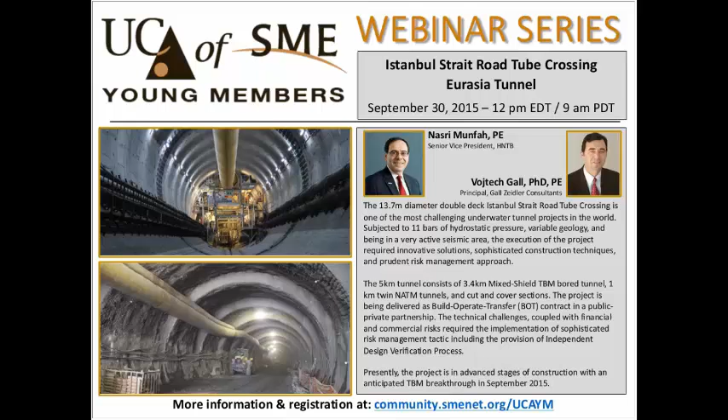Dr. Gall has over 25 years of experience in the design, construction, and construction management of tunnels and underground structures. His expertise spans from soft ground and rock TBM tunneling to cut and cover techniques. He frequently serves on expert review panels dedicated to the investigation and improvement of tunneling schemes from initial inception stages through final design development. His peer review services encompass a wide variety of facilities ranging from hydropower schemes in remote settings to complex transit structures in urban settings. He has authored over 40 technical publications on the subject of tunneling and lectured extensively on the implementation of modern tunneling techniques. With that, I'm going to turn control over to our speakers, Nasri and Vojtech.

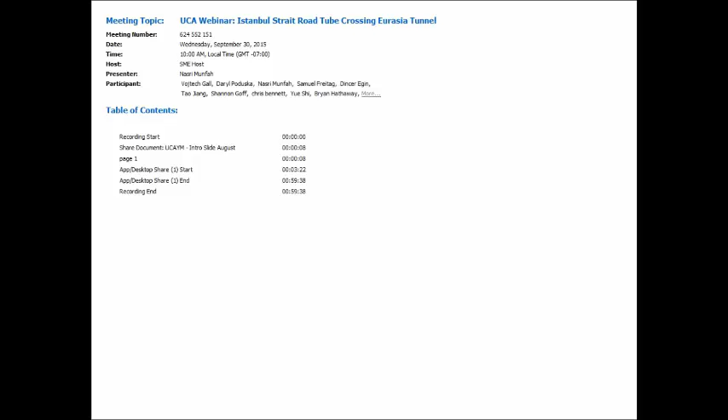Thank you, Shannon. This is Nasri Munfah, and Vojtech is with me here in my office, and we'll be making the presentation together. Just a minor editorial: Shannon mentioned that the TBM was supposed to break through in September. Just to let you know that it beat its schedule, and the breakthrough took place in August, on August 22nd.

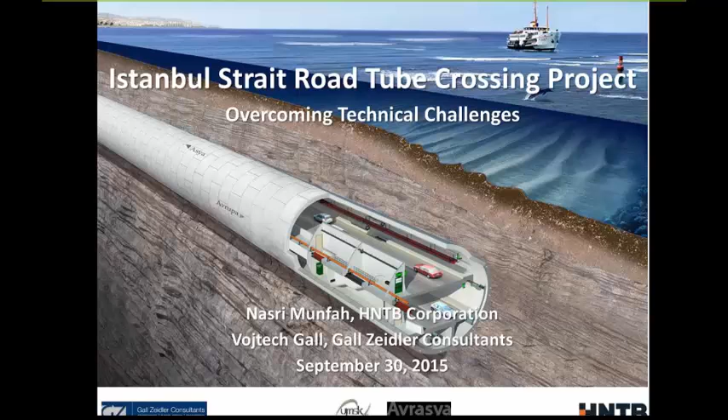The Istanbul Strait project is one of the iconic projects around the world right now. In today's topic, we're going to be covering an overview, technical challenges, the TBM Bored Tunnel, the NATM Tunnel, and to show you the construction progress up to now.

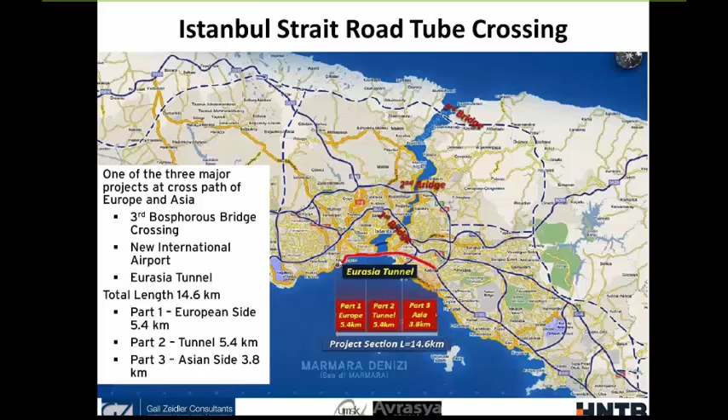The project consists of 3 major areas, 3 major components of the project. It is a road tunnel connecting the Asian side of Istanbul with the western side of Istanbul, which is the European side. It is one of 3 major programs that are going on in Istanbul at the present time. One is the third Bosphorus bridge that is taking place at this location, a new international airport somewhere in this vicinity, and our project, which is the Eurasia Tunnel. The Eurasia Tunnel will consist of 3 parts: European side, the Asian side, and the tunnel itself, as we'll be talking about in a minute.

This particular project is the first public-private partnership project in Turkey. It is being delivered on a BOT basis, which is build, operate, transfer. The concessionaire for the project is a joint venture of Yapı Merkezi, one of the largest Turkish contractors, and SK Engineering and Construction, a Korean contractor. Jointly they form a joint venture called ATAS. ATAS, as the developer, is contracted to a construction joint venture, Yapi Merkezi SK JV. The project total investment will be about $1.3 billion, in which $960 million were from various financial institution loans, and the developer put in $320 million.

To recover the cost, the project will be operating for 26 years, and there is a guaranteed traffic volume of 80,000 vehicles per day. However, based on traffic studies, it was determined that the traffic could be as much as 100,000 vehicles a day.

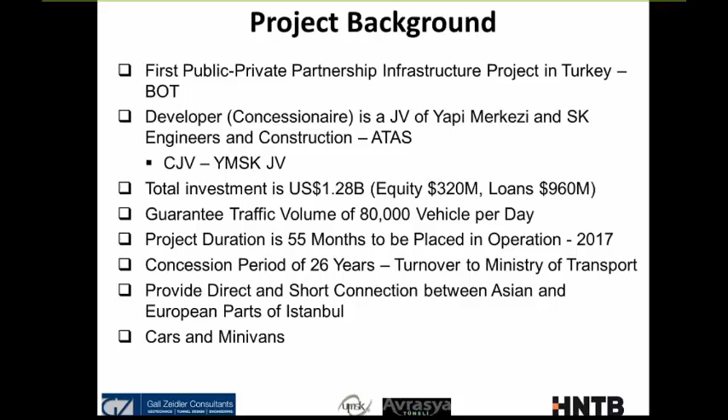It will provide a direct and short connection between the Asian and the European parts of Istanbul, and it is made specifically for cars and minivans only.

With this project, at the present time, traffic going between the Asian side and the European side goes around one of the two existing bridges, which is the shortest distance, and takes about 100 minutes of travel time. With the completion of the tunnel project, the travel time will be about 15 minutes to get to the same point, providing a shortcut between the Asian side and the European side.

It will provide considerable relief of traffic congestion on the Bosphorus bridges, significant time saving, and associated environmental improvement in terms of emission and pollution.

In addition, there are two major airports in Istanbul: the Atatürk International Airport, and Sabiha Airport, which is the local airport within Turkey. This will again provide a short connection.

One of the unique things about it is that because the project is in the historical part of Istanbul, having a tunnel rather than a bridge will improve the visual appearance and will not impact the silhouette of Istanbul.

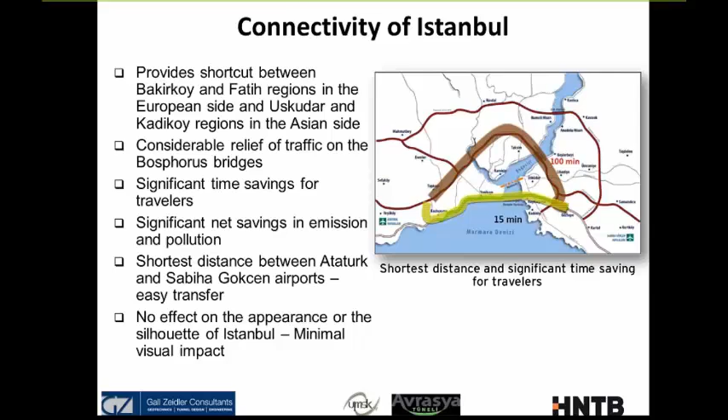The project is being delivered by a global team. Beside the developer and the contractor, the design leader is Parsons Brinckerhoff, and HNTB with Gall Zeidler is the design verification engineer.

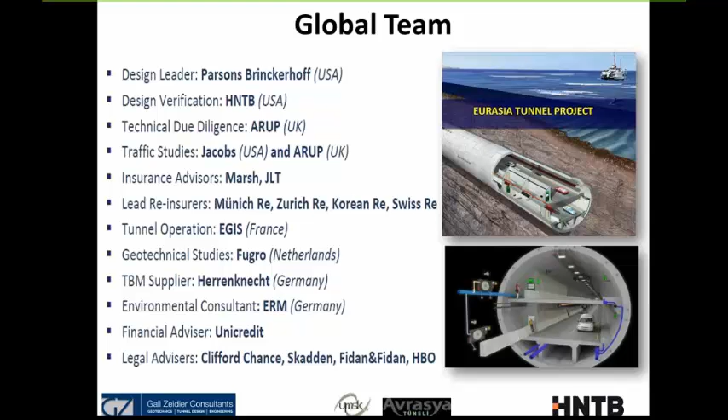Due diligence was done by Arup from the UK, and geotechnical studies were done by Fugro. Tunnel operation will be done by Egis from France, and the TBM supplier is Herrenknecht from Germany. As you can see, it is a global team bringing the best available resources and technologies to the project.

I'm going to go over the project overview right now. This area on the west side is the historical part of Istanbul, on the European side. There is the Bosphorus crossing here, connecting the Black Sea to the north with the Marmara Sea to the south. On this side is the Asian side, which is mostly residential.

So in a sense, there is a lot of traffic going between the Asian side and the European side. The project consists of three parts, as I said earlier. The first part is on the European side along Kennedy Boulevard, which consists of about 5.4 kilometers of road widening, bridges, underpasses, and pedestrian crossings.

Then the tunnel itself, which is part two, as well as the Asian side. The Asian side consists of 3.8 kilometers of road widening also, and modification to the connections to local streets and to the existing freeway system.

The tunnel itself, which is part two, consists of 5.4 kilometers of 2x2 traffic lanes on top of each other, as you can see in the cross section.

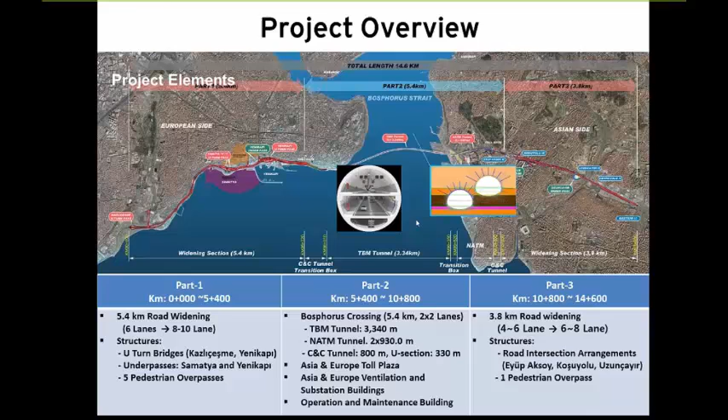The bored tunnel itself is designed to accommodate the two traffic envelopes, eastbound toward Asia and westbound toward Europe. The tunnel cross-section was determined to require 12 meters of inside diameter.

Plus a precast segmental liner of 600 millimeter thickness, resulting in 13.2 meters outside diameter.

The upper roadway deck was designed to be cast in place, while the lower roadway deck was designed to be precast. In addition to the upper roadway and the lower roadway, there is the utility gallery providing all the electrical and mechanical systems.

The upper deck and the lower deck are interconnected at various intervals to provide for emergency evacuation, as well as at certain intervals there is an emergency stop for breakdown if a car broke down.

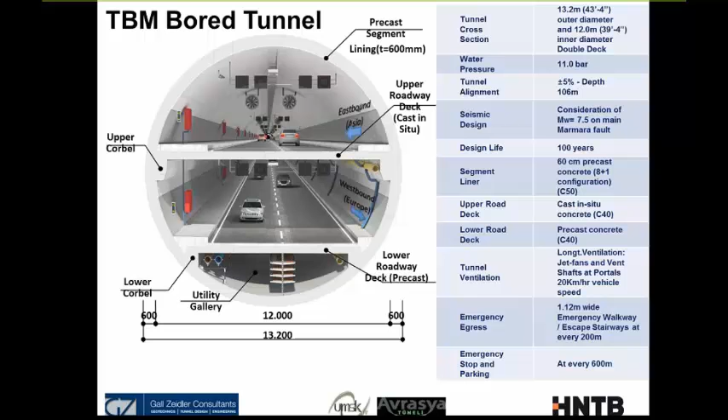The ventilation is provided by jet fans plus exhaust fans at the two ventilation buildings, one on each end, in addition to all the traffic signals and signs and the fire life safety requirements within the tunnel itself.

As I mentioned, the upper and lower roadways are interconnected with an emergency passageway. Just in case of fire in one of the two roadways, people can evacuate to the other roadway, and that becomes the emergency escape route.

As for breakdowns, every 600 meters an alcove was provided for car breakdown or tire replacement or things of that nature, in order to maintain the traffic flow.

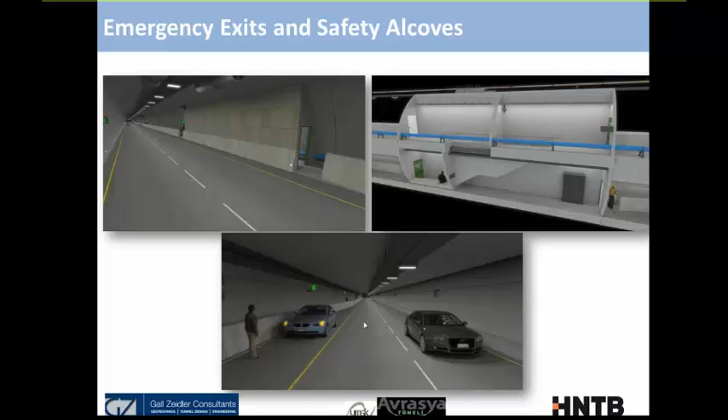The project faced many challenges and many risk issues, and we're going to be discussing some of them today, though not all of them due to the limited time we have.

Some of the challenges include the large diameter of a double deck tunnel in that location, and the complex and variable geology and hydrology in the area.

In these conditions, we are encountering mixed face conditions that need to be addressed during both design and construction. In addition, the tunnel is very deep in order to cross the channel, which is 62 meters deep, resulting in the tunnel being about 106 meters deep.

This results in 11 bar of water pressure. Furthermore, there is a high seismic zone, so the tunnel has to be designed to accommodate high seismic conditions, as well as complex transition structures on both sides, since we are going from two-over-two configuration to two tunnels side by side. Those transition zones are deep cut and cover structures adjacent to the water body.

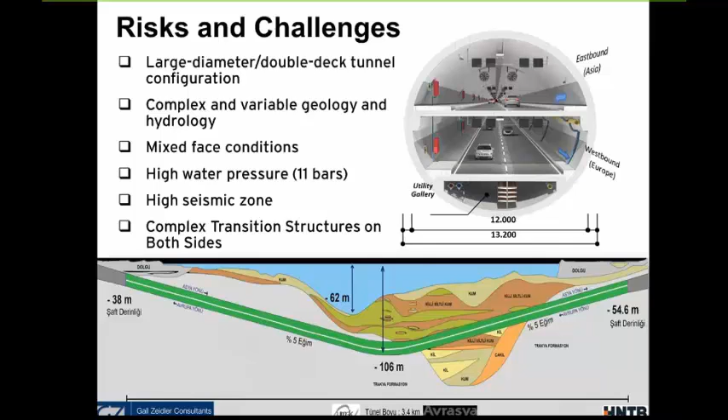As part of risk mitigation, the owner and the developer identified a need for independent design verification. That's where Gall, Zeidler, and HNTB teamed together to provide this service to the client.

The independent design verification role is critical in addressing all critical issues, reviewing the design for correctness, identifying potential risk issues, identifying potential corrective action, and providing betterments and potential solutions to the project's challenges. This system was implemented throughout the entire phase of the project, from conceptual planning, through final design, construction, and facility operation.

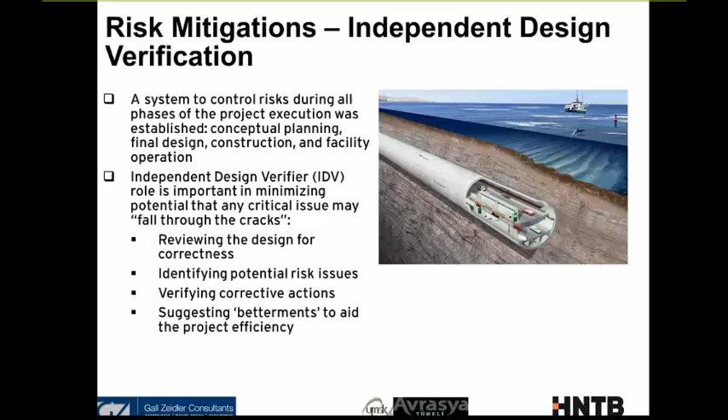And it was not just limited to the structural component, but also expanded to all issues, including mechanical, electrical, fire life safety, and all related elements required for the functioning of the facility.

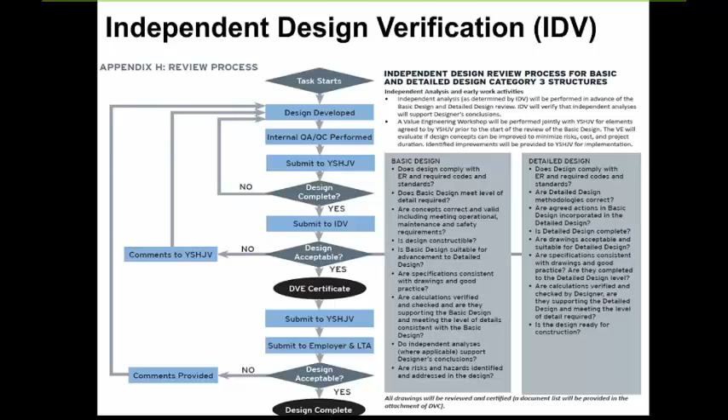A detailed design verification process was established and was reviewed and approved by ATASH, the developer, as well as the owner, in which every element has to go through a detailed independent review and verification. All calculations must have independent checks, and all analysis must be independently reviewed and verified.

I'd like to talk a little bit about the geology of the area. The Bosphorus Strait was formed by major historic tectonic forces that resulted in two rock formations on both sides of the Bosphorus, called the Trakya Formation, which is highly fractured, faulted, and intruded. The Trakya Formation consists mainly of sandstone and mudstone, and is highly fractured and water-bearing strata.

In addition, it has several locations with a lot of volcanic dike intrusions.

Going from the Trakya Formation into alluvial deposits within the body of water, the alluvial deposit consists of coarse-grained soils including gravel and sand, as well as fine-grained soils like silts and clay, which vary vertically and longitudinally.

Extensive geotechnical investigation was performed on land as well as in the water. Fugro did a lot of this investigation, as you can see from the marine borings taken along the alignment of the project.

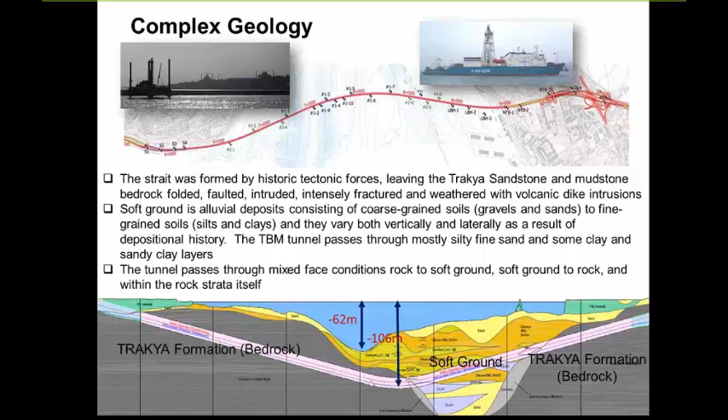In addition, there are faults at various locations along the alignment, and the rock property varies within the cross-section itself as well as along the alignment.

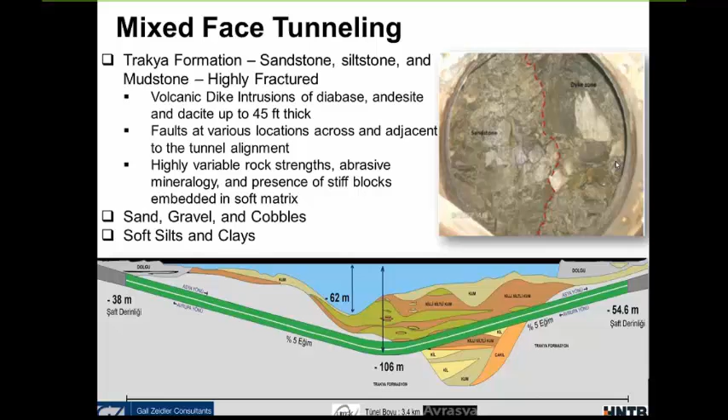The other challenge is the seismic condition of the area. The location happened to be at a cross between three continents, so there are three tectonic plates, the African, the Anatolian, and the Eurasian plates. They all happen to be at that location.

We anticipate that at least one medium intensity earthquake will happen in Istanbul every 50 years. Therefore, the tunnel has to perform under earthquake conditions, in a couple of situations. One is to continue to be operational, and the other one is to be repairable very quickly.

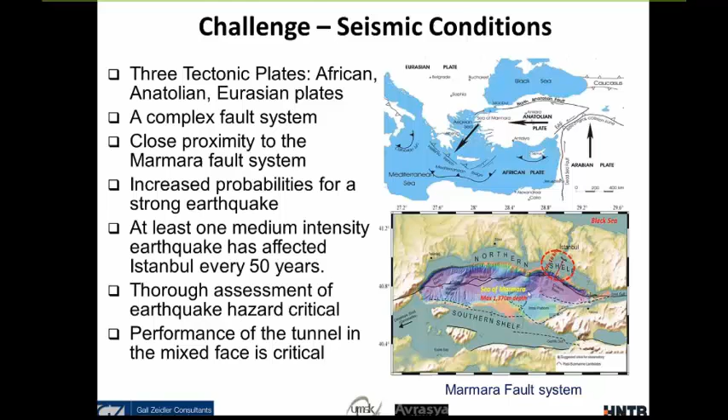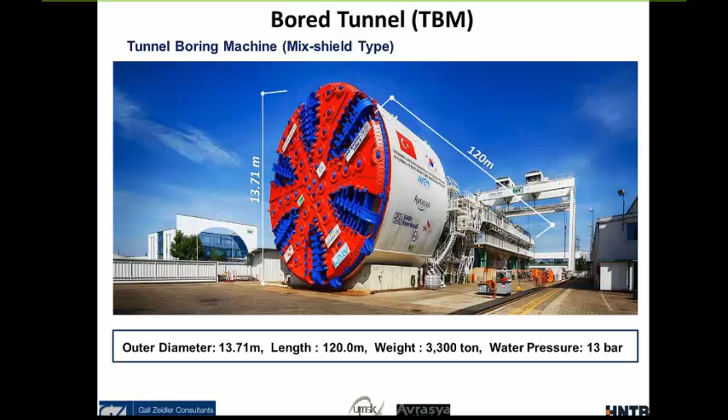In order to build this tunnel, the design called for a TBM. The selection was made using a Herrenknecht Mixed-Shield TBM, which is a slurry TBM in a sense. The TBM was manufactured in Germany and was delivered to the project site. The outer diameter of the TBM is 13.71 meters with a length of 120 meters, and it's capable of handling 13 bar water pressure.

The TBM design was designed to handle mixed face conditions and to operate mostly always in a closed mode situation. As you can see here in the face of the TBM, it had disc cutters as well as soil knives or soil scrapers, distributed throughout the face, and made accessible from the back. I will talk about that a little later. In addition, behind here there is a jaw crusher to deal with boulders as well as cobbles that may be encountered.

The plan was to advance between 6 to 7 meters per day, average daily advancement, and the maximum they were able to achieve was 18 meters per day. That was within the planned schedule and was achieved. It was launched on April 19, 2014 and completed its drive on August 22, 2015.

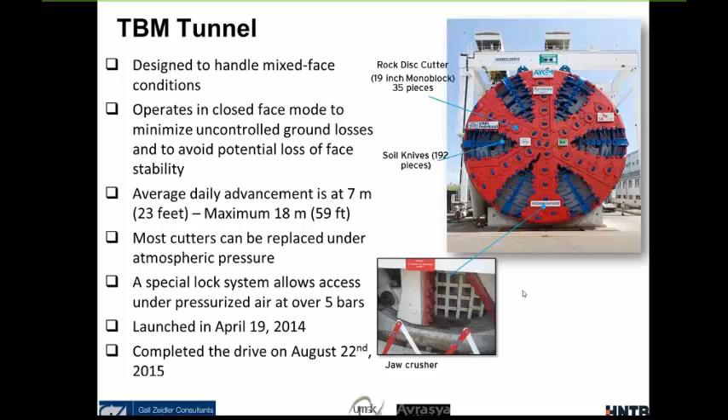Here are some pictures of the assembly of the TBM within the launch shaft, which will also act as the transition, the Asian transition box. As you can see from this picture, the Asian transition box is very deep. It is obviously close to the water, and it is very challenging to build. It was in the range of about 120 meters in length with variable widths and variable depths.

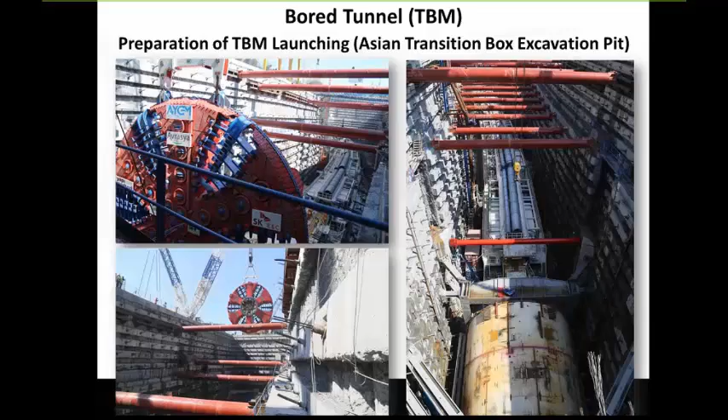As I said, April 19 was the start of the TBM. That was the launch day. And it progressed very successfully.

The TBM liner consisted of 8 segments plus a key. The segments are 2 meters in length and 600 millimeters in thickness. They are double reinforced, and because of the high water pressure, provided with double gasket. The segments were bolted in both directions with shear keys and sliding rods.

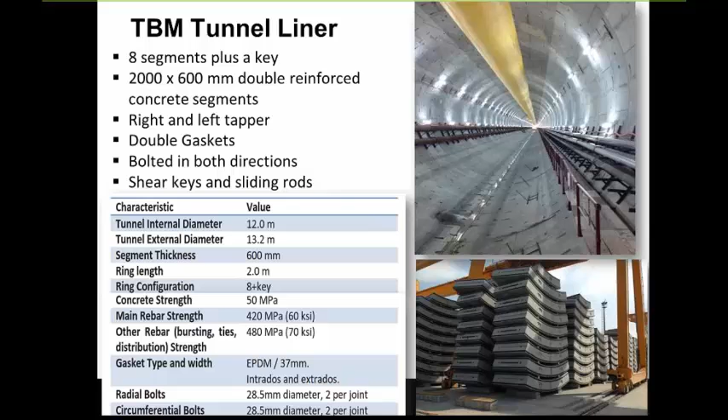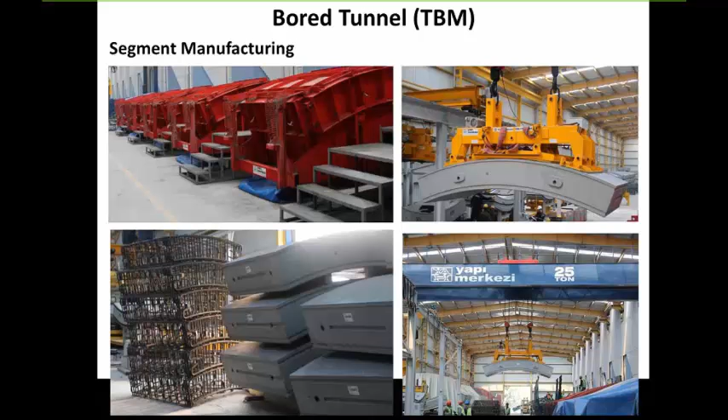Here are pictures of the segment manufacturing. As you can see on the lower left side, you will see the reinforcing cages plus the dismantling of the segments, as well as the shear key of the segments. The segments were cured and then delivered to the site, and each stack consists of 8 segments, and the key were identified, and each one of them has a barcode that will identify every segment and every ring and all the properties that were there.

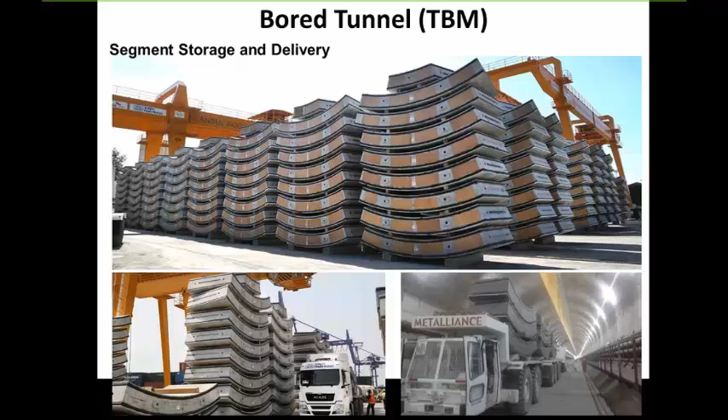The segments were delivered unusually to the tunnel using rubber tire trucks, as you can see in the lower right-hand side picture.

As I mentioned, there are some challenges and how the project dealt with them, including high water pressure as well as the seismic conditions. Under high water pressure, it's difficult for TBM maintenance and replacement tools as well as potential water leakage. Therefore, the design called for a cutter change system to be done under atmospheric conditions, as well as identification of wear detection in the cutting tools, as well as providing ability to have hyperbaric intervention if needed. In terms of water leakage, double gaskets were provided, as I mentioned.

As for the seismic conditions, different ground response during the earthquake due to different characteristics of the ground conditions had to be assessed. Therefore, we considered 8 sets of analysis, and the project identified the need for seismic joints to be placed. Two seismic joints were provided at the interface between the rock and the alluvial material.

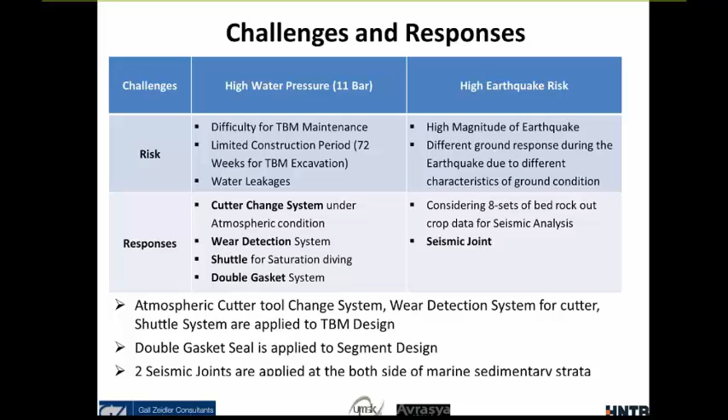Regarding the high water pressure, as I mentioned, the cutter changes can be done under atmospheric condition from the back side. As you can see here on the left side picture, an illustration showing the ability to pull the cutter ring assembly out and replace it with new cutters. So there were

35 pieces that can be replaced from the back. In addition to that, the cutting knives were, most of them, able to be replaced from the back. The picture in the middle shows the condition under which one of the workers was replacing one of the disc cutters from the back.

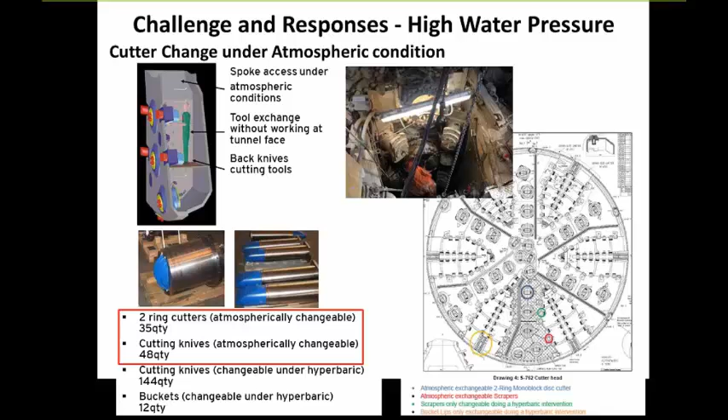However, certain components of the TBM cannot be replaced from the back, and therefore there is a need for hyperbaric intervention if needed. To do that, under 11 bar of water pressure, there was a need to do saturation diving. The saturation diving was done via a capsule that can be brought to the site, brought into the face of the TBM, and under pressure, saturation diving can be done to do any maintenance or repair on the front of the TBM.

The saturation diving would require a significant amount of time for the workers to be under high pressure, and as a result they have to be in a capsule for several days or even up to a week or more to be able to adjust in terms of the temperature and the pressure.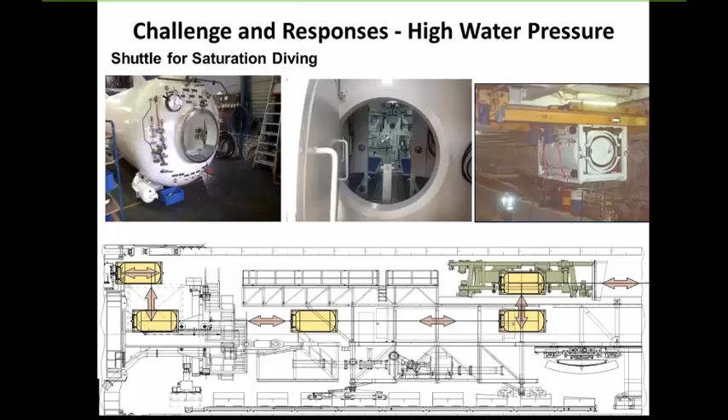The tail skin seal system was also provided in order to supply the grout immediately as the TBM advanced and the ring is pulled out into the ground. The grout was done through the shield itself,

and 3 brush packings were provided in addition to an inflatable tail skin seal that can be used in case of an emergency or a need to do a repair. The system consists of 3 brush seals plus, as I said, the inflatable seal.

And here's an illustration of the brushes as well as pictures of the brushes, the tail brush packing in the factory.

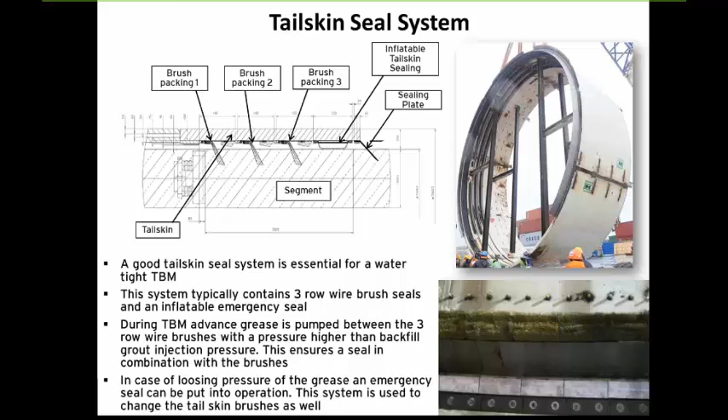The TBM liner, the segmental liner, were double gasketed for the high water pressure, and there was a need to have bolting in both directions, for connectivity as well as for seismic resistance against seismic loading, so spear bolts were used to make the connections.

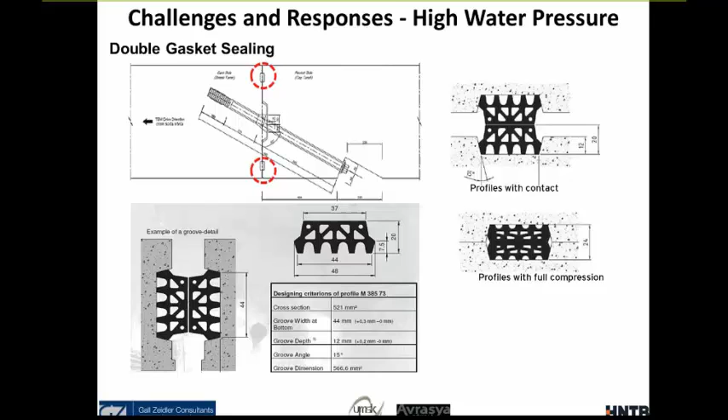Regarding the seismic condition, as I said, two levels of design earthquake were considered. One is the functional evaluation earthquake, which has a high probability of occurrence, 20% in 100 years. That consists of an earthquake magnitude of 7.5 on the Marmara Fault. In this condition, life safety must be maintained and operation of the facility must continue with slight to no damage to the structure. Upon inspection, the tunnel should be put back into operation.

As for safety, the other level is the safety evaluation earthquake, which has a smaller probability, 4% in 100 years, or a return period of 2,500 years. That is an earthquake magnitude of 7.5 anywhere. In that case, life safety has to be assured and there must be no failure or flooding of the tunnel, with minor structural damage repairable within a reasonable time.

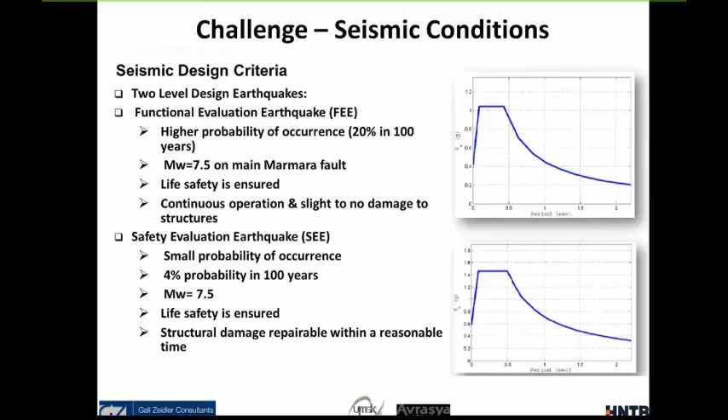Extensive analysis was done taking into consideration the various ground conditions. This is one example of the analysis that shows the forces, in this case the normal forces, showing that there is an excess of forces at the interface between the rock and the soft ground.

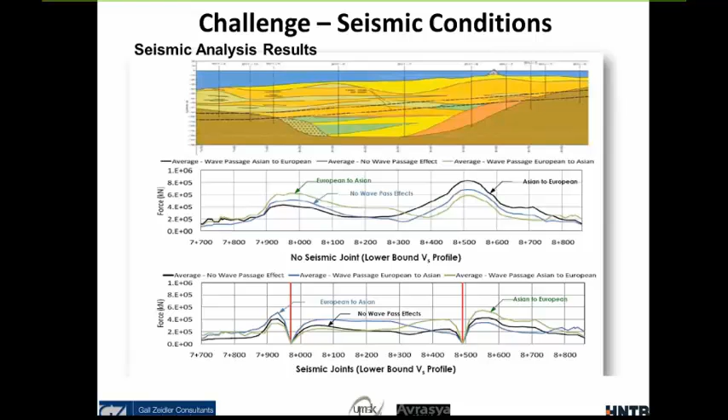By introducing seismic joints, the lower portion of the graph shows that the loads or forces dropped dramatically. So two seismic joints were introduced at the interface between the rock and the soft ground. The seismic joint consists of two steel joints interconnected with omega seals as well as pistons that would allow movement in expansion and contraction of 75 millimeters in each direction, as well as shear deformation of 50 millimeters.

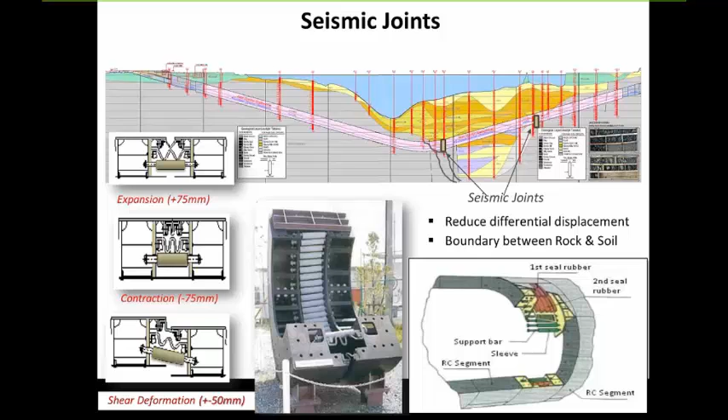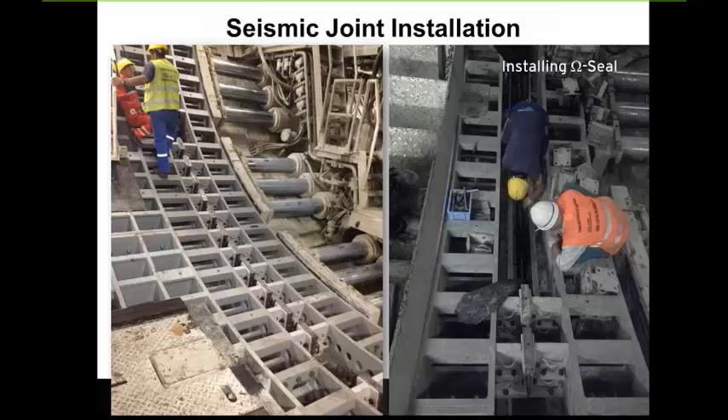At this point, I would like to turn it over to Vojtech to talk about the NATM segment.

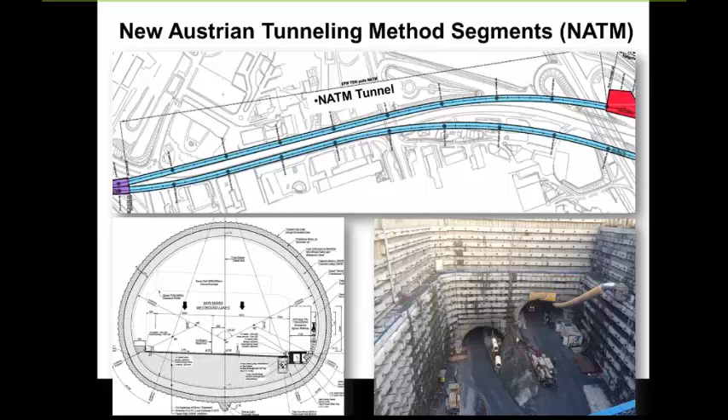So as Nasri mentioned earlier, we were involved as the independent design verifier, and were looking at the design prepared by Parsons Brinckerhoff, supported by a local tunneling consultant, IGT, from Austria. And with that, we looked at the design methodology, in particular the sequence and support of excavation for the tunnels. We looked at tunnel specifications and quality of materials.

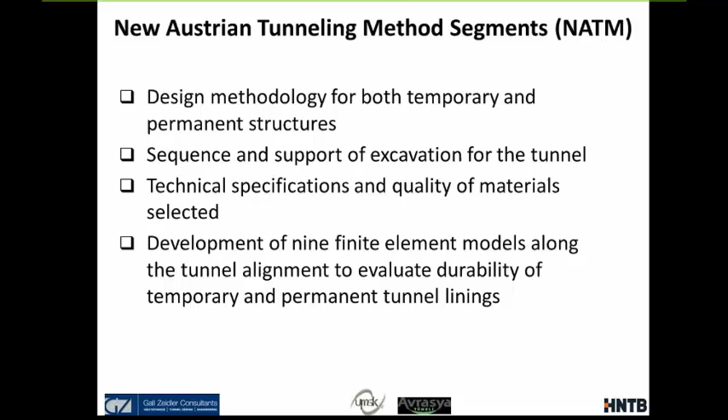And in order to support our findings, we developed a series of a total of 9 finite element models at typical and critical locations along the alignment to look into the adequacy of the temporary and permanent tunnel linings. So these are typical tasks that one carries out as an independent design reviewer.

Here you see in this slide a summary of the alignment, the cross-section showing initial support with shotcrete lining and a systematic rock bolting on the right upper side. And what is also noteworthy is that we had to look at 4 cross passages for NFPA or life safety requirements, 1 lay-by section, and 4 mechanical electrical plumbing rooms that housed installations to support the tunnel operations when completed.

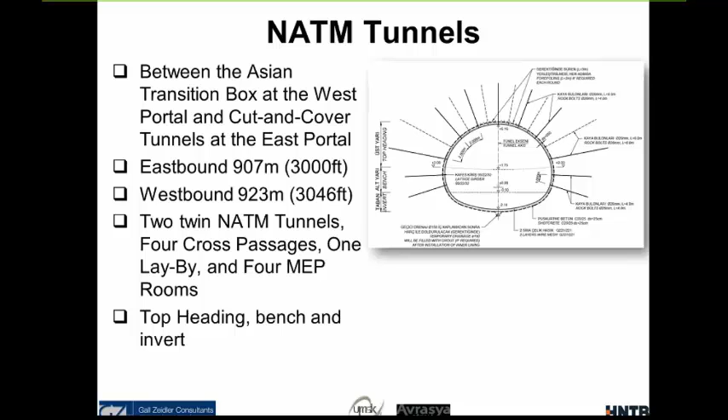The tunnel excavation was typically done in a top-heading, bench, and invert excavation. As you see here, this would be the top-heading, bench, and invert. On the right side, we see a typical configuration of our finite element models for the design verifications.

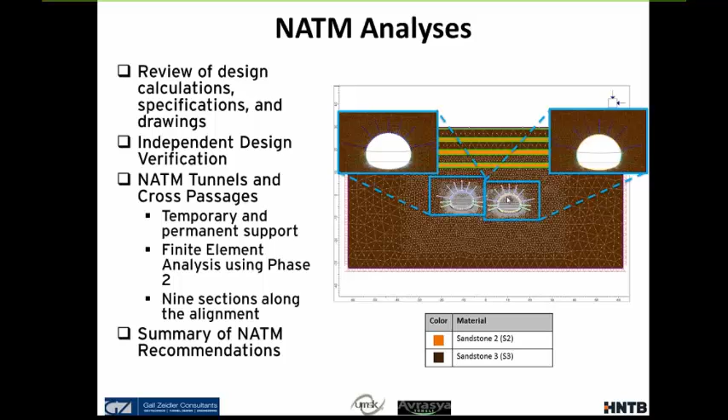And from looking at not only the structural calculations but also design drawings, specifications, and drawing from experience on large international projects, we came up with a summary of NATM recommendations that I will lay out in a few minutes.

This again is a summary of the Trakya formation, which is essentially an interlayered system of shales, siltstones, and mudstones, highly fractured, also faulted and folded, weathered with intrusions of diabase, as mentioned earlier. And what comes on top of it is a challenge, for example, here at the east portal, of relatively shallow tunneling and tunneling underneath a highway bridge and its foundations.

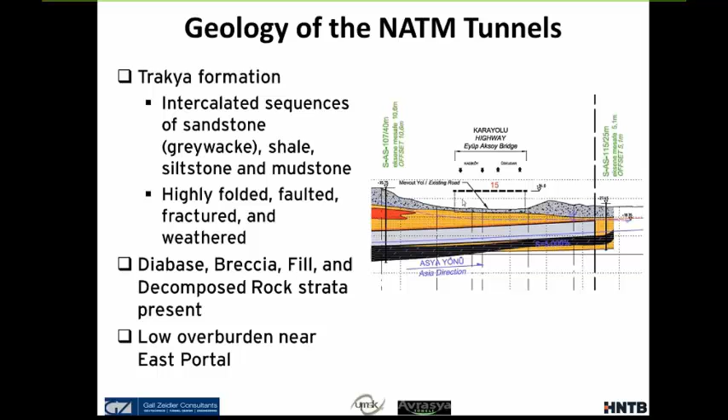And so a big concern was to control the settlements, and for that the designer foresaw and rightfully implemented the use of a pipe arch canopy as a positive pre-support in the tunnel roof.

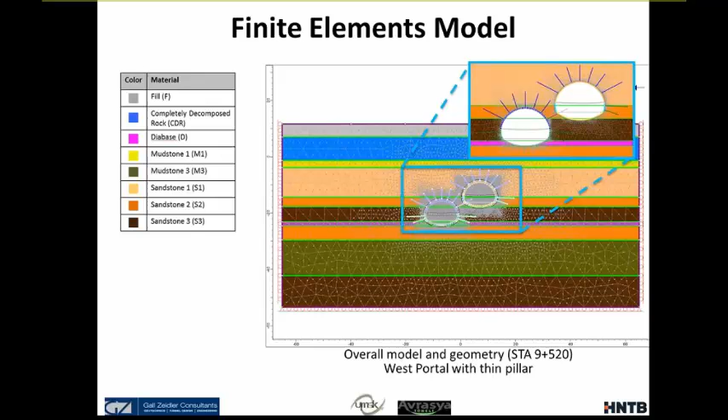Here again, this typically layered system of the rock strata between the mudstone, sandstones, and the individual layers are essentially very similar by composition, but are of varying strength and deformation characteristics.

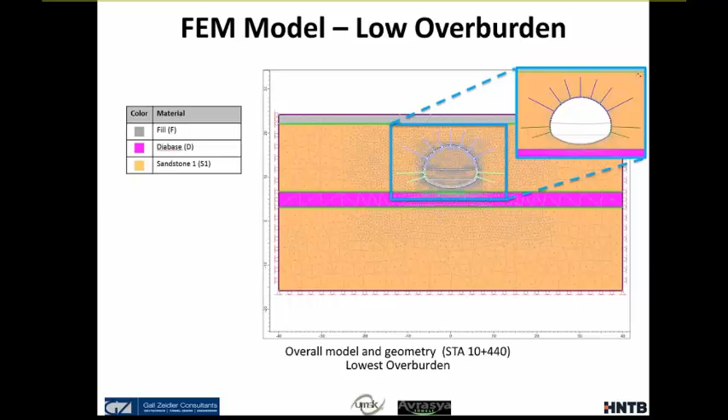Another model was developed here, in particular for the low overburden at its lowest region, which was on the order of some 8 meters. The recommendations included looking at the Trakya formation, and in particular during tunneling, in order to better control the groundwater around the tunnel, to develop a systematic dewatering system.

Further, we called for the installation of additional instruments to perform more rigorous monitoring and instrumentation at complex areas, meaning typically overburden structure areas. We also called for the development of a systematic toolbox to implement contingencies should ground conditions be of lesser quality than anticipated, such as installing more shotcrete, additional rock bolts, additional pre-support, and potentially subdividing the face to control face conditions better.

We also engaged the contractor during design development in a discussion to use fiber reinforced shotcrete instead of welded wire fabric. However, we found out later during construction that welded wire fabric, being well known in Turkey and Istanbul, was the preferred method by the tunneling subcontractor. So the tunnels were supported by welded wire fabric reinforced shotcrete.

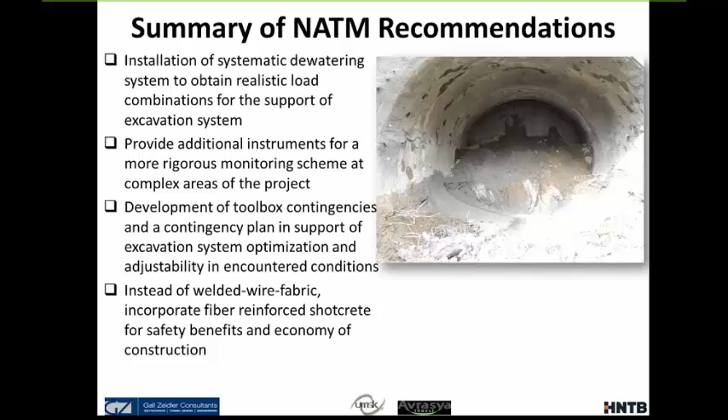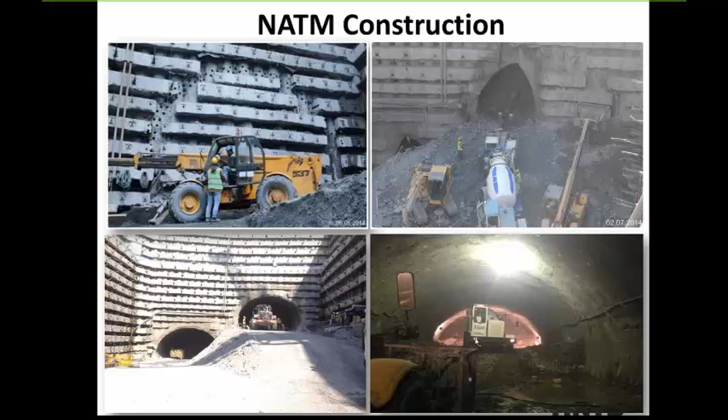Here you see again the narrow pillar with the two tunnels side by side but of different elevation, and here a typical top heading excavation with the bench being brought to the top heading face within about two tunnel diameters.

Here you see on the left side a typical NATM installation of initial shotcrete lining, a sawtooth excavation as we call it, to be able to install pipe arch pre-support from within the tunnel.

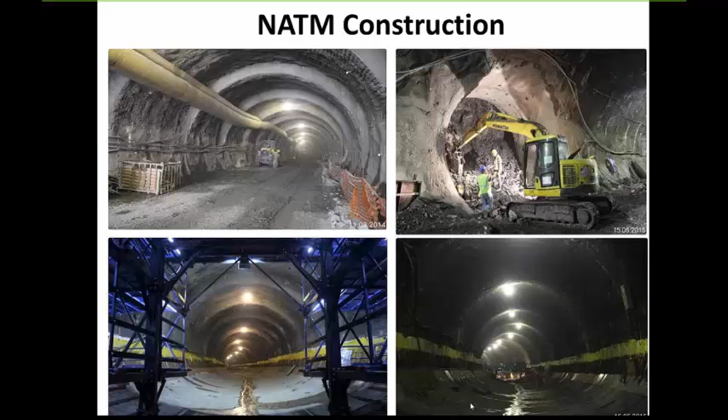Here, excavation into one of the four cross passages. Here you see the waterproofing in the invert section with a protective concrete layer and scaffolding continuing the waterproofing installation. And here again the typical tunnel lined with initial shotcrete lining and waterproofing in the invert, which will be continued all the way around the entire perimeter.

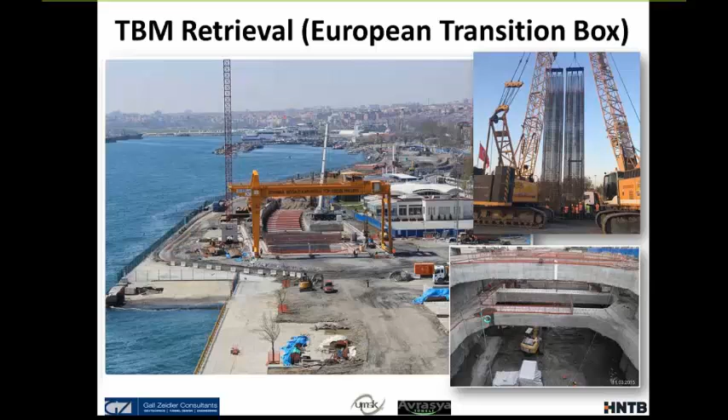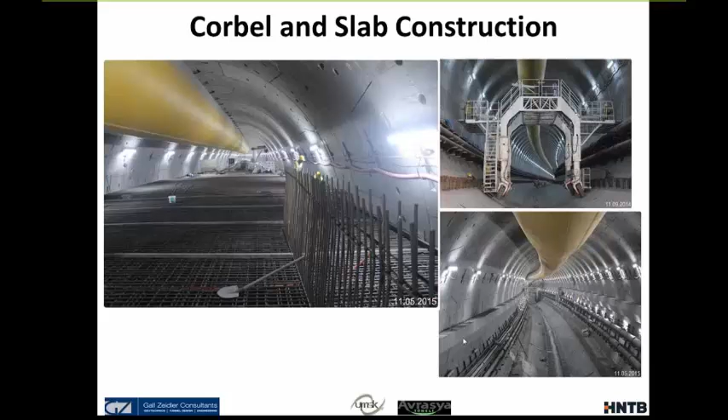While the TBM is advancing, the corbel construction and the upper slab construction was proceeding behind it using special scaffolding equipment, and the concrete slab had to be concreted in order to meet the schedule. On the left picture it shows the rebars for the upper roadway slab, and on the lower right it shows the corbel for that slab.

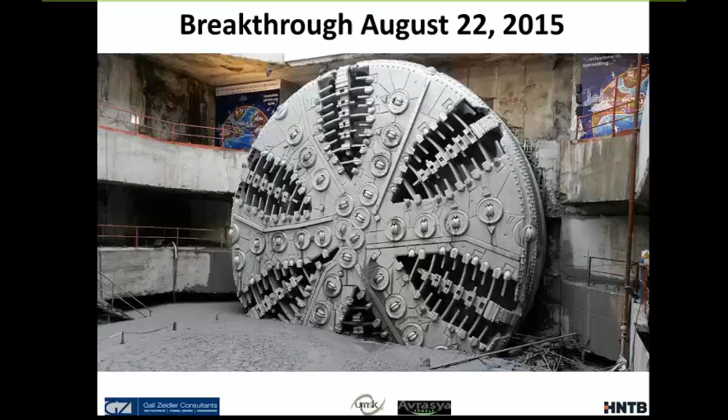As I said, the breakthrough occurred at least two weeks ahead of schedule on August 22nd, very successfully, and the TBM penetrated through the bulkhead wall on the European transition box, and now it has been disassembled as we speak. Meanwhile, the interior structures continue to advance in construction.

In general, in conclusion, the owner as well as the contractor realized the high risk that a project of this nature would entail. As a result, they established risk mitigation measures early on to deal with the various conditions that were going to be encountered, such as complex and variable geological and hydrological conditions, highly fractured rock, intrusion of dykes, mixed face conditions, high water pressure, high seismic conditions, and large tunnel diameter.

They realized the importance of that and put the proper measures in place, including having the independent design verifier as part of the team early on and throughout the various phases of construction. As a result, they selected a suitable TBM, implemented seismic joints at the interfaces, and adopted a flexible NATM design with a toolbox to meet the various ground conditions.

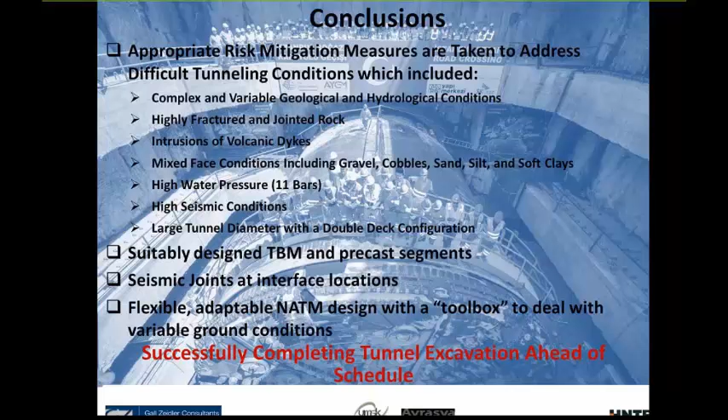And the project has been completed successfully, ahead of schedule.